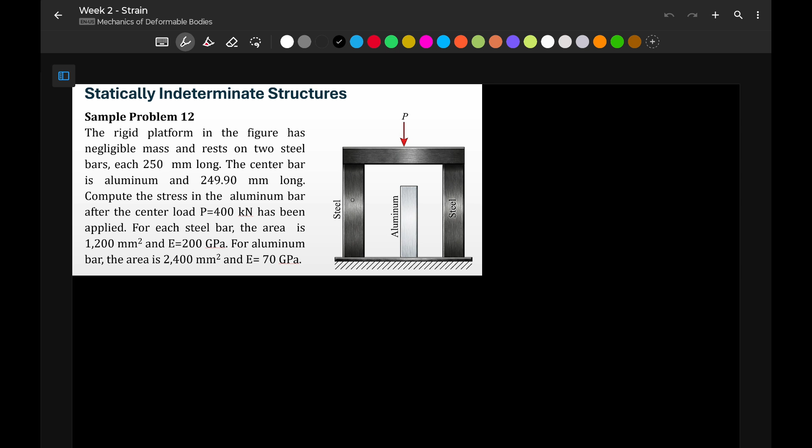Pagka yung load natin, na-compress na yung lahat ng material to this point. Imagine niyo na-compress na. Nandyan na yung ating bar. Ang mangyayari dito is dapat hindi doon. Yung steel bar natin, magde-deform on this length.

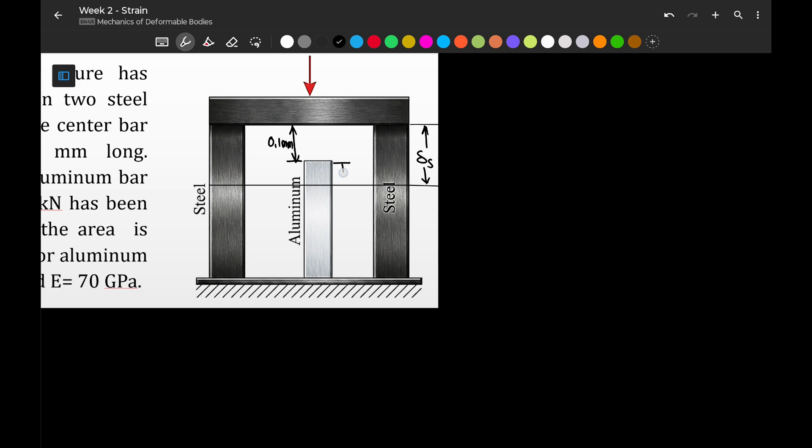Now, since shorter yung ating aluminum bar, so this is our 0.1 millimeter. Ang deformation lang niya ay itong maliit na to, deformation ng aluminum. So, from our compatibility equation, inuna ko lang yung compatibility equation for this one kasi obvious.

So, for compatibility equation, we can say that yung deformation ng ating steel, which is from this point to this point, is equivalent to deformation ng aluminum plus 0.1 mm. Kasi yun yung difference nila, 0.1 mm. So, this is our compatibility equation, and it will be the basis for our equation 1.

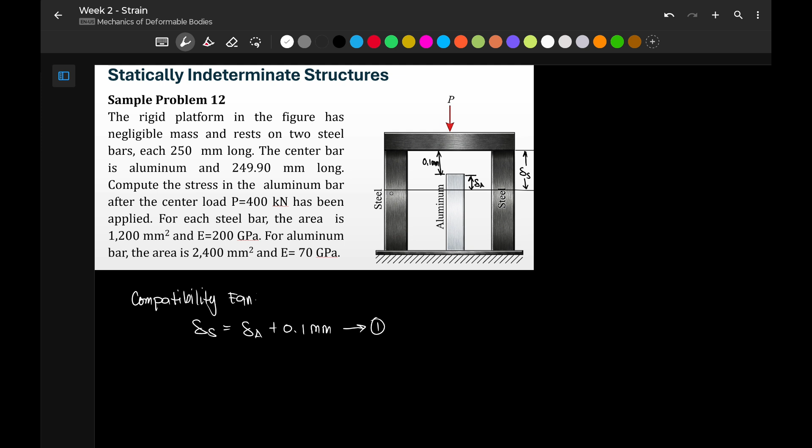Now, pag-usapan naman natin ngayon yung ating equilibrium equation. So, what will happen here is, yung P na to, i-resist yan ng tatlong material. Meron ka dito kay steel, at meron ka din dito kay aluminum, and then kay steel. So, yung ating equilibrium equation, we can say that our PA plus 2PS is equivalent sa value ng P, whereas P is 400 kilonewton. So, palitan na natin ito ng 400 kilonewton. So, we have now the basis for our equation number 2.

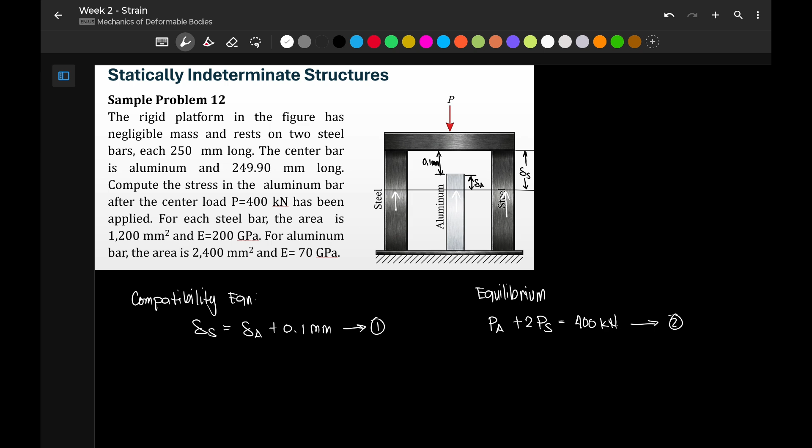So, we have two equations, we have two unknowns, we can solve for the missing forces. Okay, sige, let's expand this equation number 1.

So, the deformation ng steel, that is PL over AE ng steel, equivalent sa PL over AE ng aluminum plus 0.1 mm. Take note, may additional na 0.1 mm dito. Therefore, the unit of all of our length should be in millimeter. Kasi millimeter ito, dapat consistent tayo.

Alright, so what we have now here is PS multiplied by the length of steel. Ang length daw ng isang steel rod natin ay 250. The area ng steel ay 1,200 mm squared. So, consistent na lang tayo sa unit ha. And our E is 200 times 10 to the 3 Newton per millimeter squared, so that is gigapascal.

And for our aluminum, we have PA. The length here is 249.9 lang, over our area which is 2,400 square millimeter. And our E is 70 times 10 raised to 3 Newton per millimeter squared. So, consistent tayo sa unit na Newton at millimeter plus 0.1 millimeter.

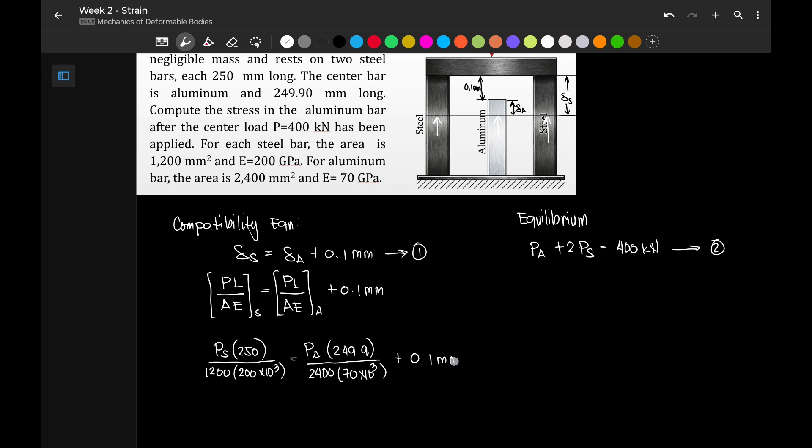So, we can say here that our PS, pwede nating i-transpose ito lahat dito sa kabilang side. Okay, so meron tayong PS equivalent to, we have here PA.

Kunin na natin yung value nitong 249.9 para maging coefficient na lang siya ni PA. So, we have 249.9 divided by 2,400 times 70 times 10 to the 3. We have 1.4875 times 10 raised to negative 6 PA plus 0.1 millimeter.

Take note, ang assumption natin, the unit of force here is Newton and the unit of length is millimeter. Okay, now ito naman, kunin na rin natin yung value. We have 250 over 1,200 times 200 times 10 to the 3. We have 1 over 960,000.

So, we have PS over 960,000. Pwede na nating iangat yung 960,000. So, we have here PS equivalent to 960,000 multiplied by 1.4875 times 10 raised to negative 6 PA plus 0.1. Again, take note of our unit, dapat consistent tayo na Newton at millimeter lang yung kinocompute natin. So, this is now our equation number 2.

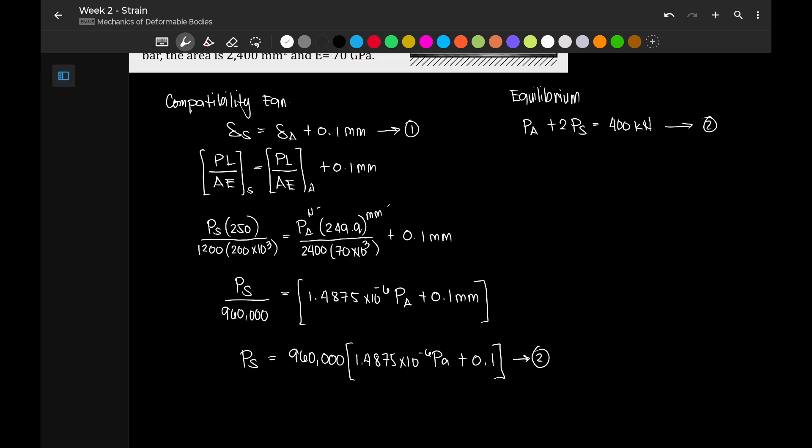So, dito pwede na natin siyang i-substitute. You can use either shift solve or manipulation. So, we have here PA plus meron tayong 2PS wherein our PS is 960,000 multiplied by...

1.4875 times 10 to negative 6 PA plus 0.1, equal to, take note, 400 kilonewton ito. Again, sabi natin, consistency of unit, gawin nating Newton. Here, we can solve for our PA, we can use shift solve na lang. So, we have here alpha x plus 2 times 960 times 10 to the 3 times 1.4875 times 10 raised to negative 6 alpha x.

Ang daming parenthesis. Plus 0.1. Take note of the parenthesis, kasi pag namali ka ng lagay ng parenthesis dito, GG tayo doon.

Okay, then shift solve. Let's solve for PA. We have PA equivalent to 53,941.9087 newtons.

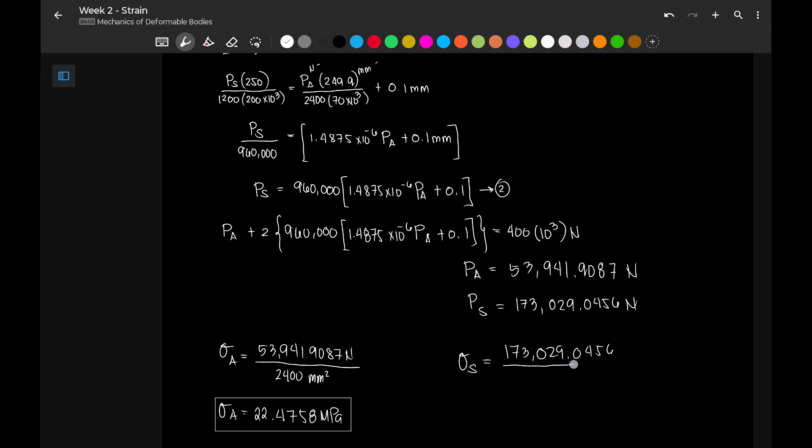Then for our answer number 2, we have 173,029.0456 divided by the area na 1,200 millimeter squared. So our sigma S is over 144.19087 megapascal. So sobra ako ng decimal.

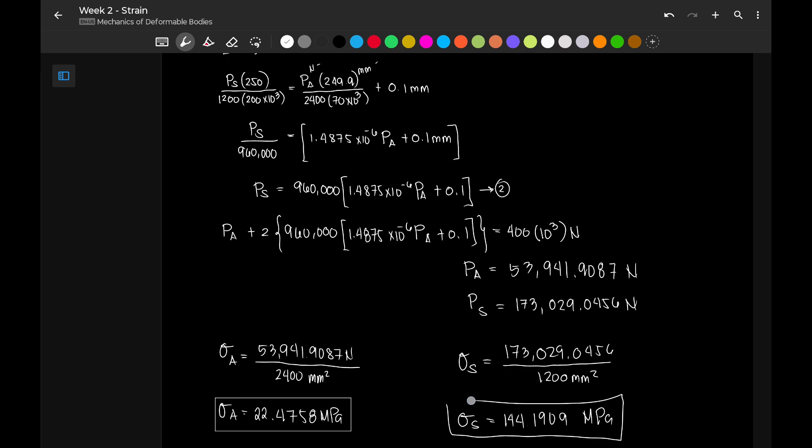So 3 or 4 yung gamit ko kadalasan, 144.1909 megapascal. So this is our answer for this problem.

So welcome back on our discussion on axial deformation. We are now on sample problem number 13. Sabi dito, a composite rod in the figure is stress-free before axial load P1 and P2 are applied. Assuming that the walls are rigid, calculate the stress in each material if P1 is 150 kilonewton and P2 is 90 kilo Newton.

Okay, so what will happen here is magkakaroon tayo ng reactions due to P1. Since P1 ay 150, si P2 ay 90, i-resist yan ng ating mga walls. So meron tayong reaction R1 dito at meron tayong reaction R2 dito. Similar with our previous problems, hindi natin alam kung ano si R1 and si R2.

Again, nakabase yan sa kung paano magre-resist ng load yung materials natin. Kasi kung ano lang yung nire-resist nila, yun yung tinatransfer nila sa support. Pero ang kaya natin gawin is to use method of sections to determine the internal forces inside each member. So unahin natin kay aluminum.

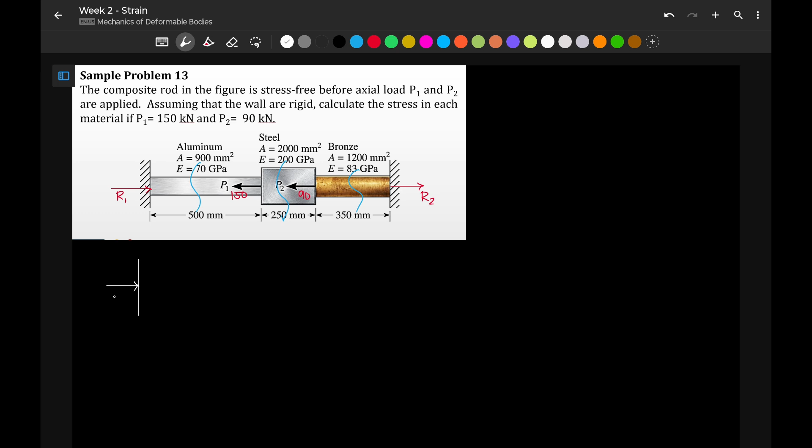For aluminum, meron tayong rigid wall. Okay, this is R1. And then magkakaroon tayo ng reaction dito. Let's call that PA.

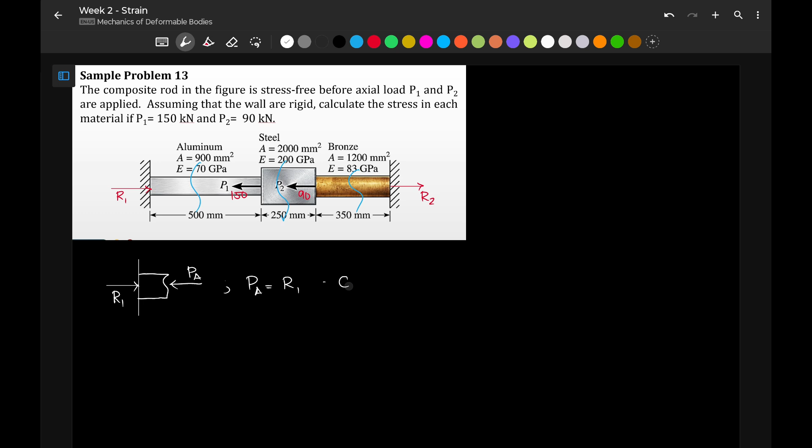Okay, that is compression by summation forces horizontal. We can say that PA is equivalent to R1 and that is compression. So nako-compress si R1 or si aluminum. Ibig sabihin, nagsho-shorten siya. Puntahan naman natin si steel.

Okay, then meron tayong steel dito. So nandito pa rin si R1. Then meron tayo ditong applied load P1 na sabi natin si P1 ay 150 kilonewton.

So pwede tayong mag-assume muna ng reaction. Again, assumption lang tayo dito, no? Hindi natin pwedeng sabihin kung ano muna yung actual value kasi unlike nung previous problem natin na dalawa lang yung material, we can easily distinguish na sila ay tension or compression.

Pagdating sa pangatlo, hindi natin alam if yung value ng R1 will be greater than 150. Kasi kapag mas mataas yung R1 sa 150 na to, ang mangyayari, assumption natin, compression. Kapag mas mababa naman si R1 kaysa kay 150, magiging tension, ano? So ang assumption muna natin dito ay tension.

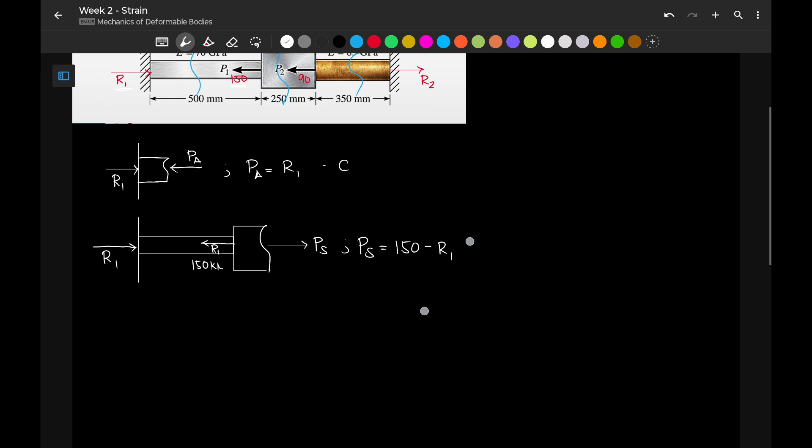Okay, next, finally, pagdating sa bronze, okay, ay ba't ba inano ko to? Section na pala to. Ay okay, meron tayong reaction R2 dito. Definitely, this is tension. Let's call this PB. By summation forces horizontal, PB is R2.

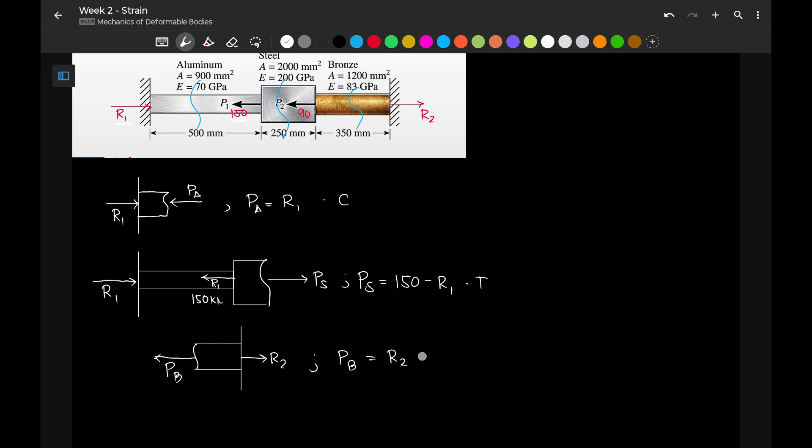Alright, so meron na tayo ngayong mga equations of equilibrium. Okay, that's one step. Step number 1, ano? But another thing is we can also say that R1 plus R2 is equivalent to what? 150 and 90. So that is equal sa 240 kilonewton. So we can say that R2 is 240 kilonewton minus R1.

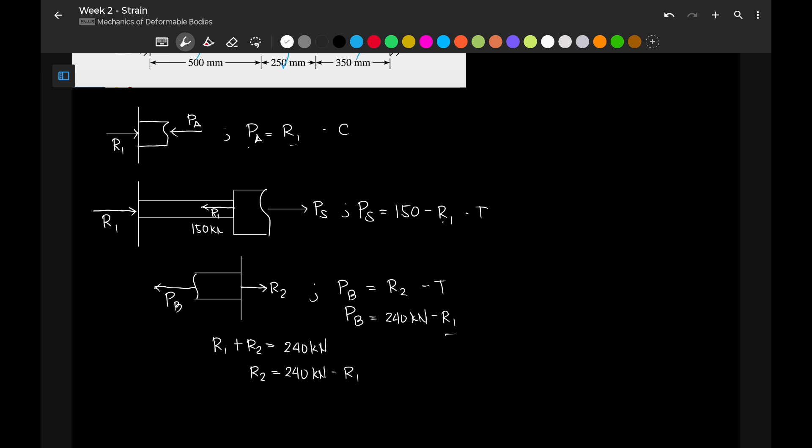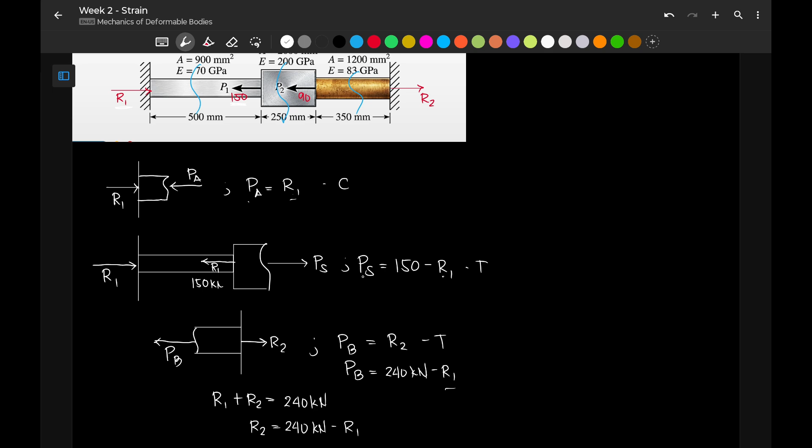Para nang sa ganon, si PB we can rewrite as 240 kilonewton minus R1. Lahat ngayon ng ating forces, internal reactions, ay in terms of R1. So consistent, mas madali yung pagsosolve natin. Ano, so again, kapag mga ganitong problem, gamitin nyo isang unknown variable lang. Isang variable lang yung nagde-describe ng ating mga internal forces. In this case, R1 yung ginamit ni Sir to describe the internal forces. PA is equivalent to R1, PS is 150 minus R1, PB is 240 minus R1.

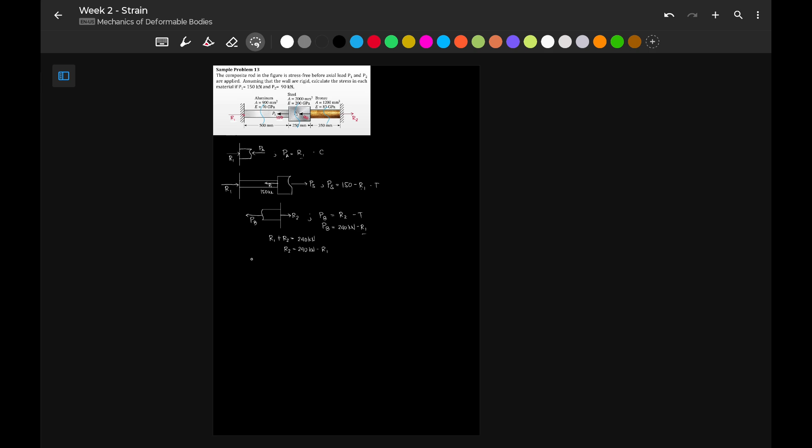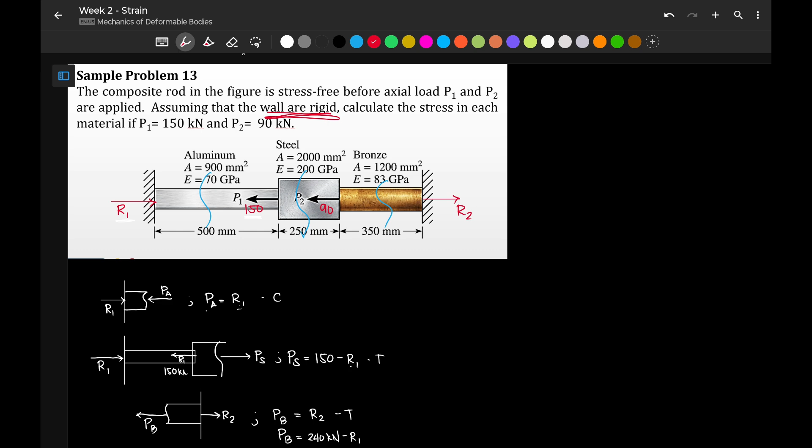Okay, next, tapos na tayo sa static equilibrium. Let me just resize this one kasi maubusan tayo ng space. Okay, puntahan naman natin yung geometry. Paano naman yung elastic deformation? Ang sabi ng problem, walls are rigid. Meron na naman siyang binanggit. Pag nakita nyo yung mga ganyang term, you assume that the total deformation is 0.

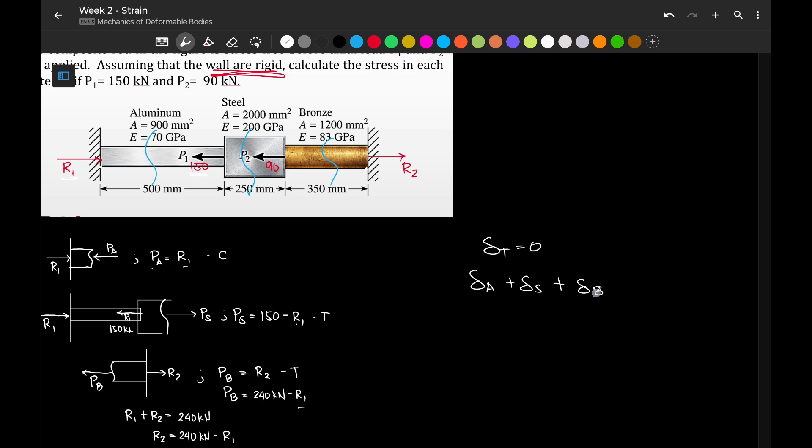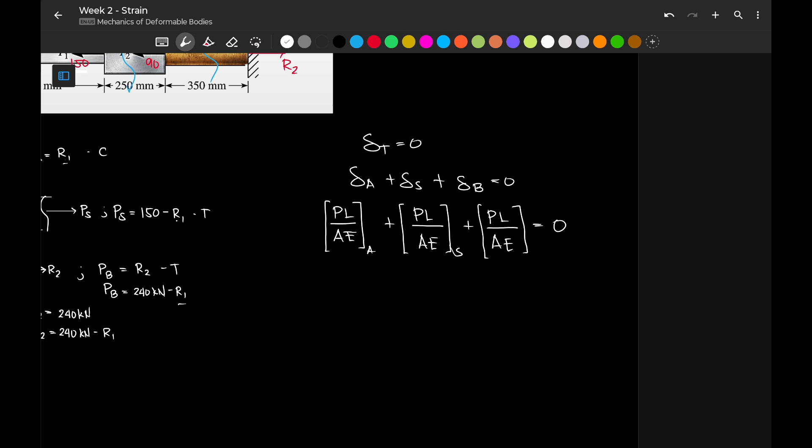Since it's rigid up to here, both ends are the same, there will be no deformation. So we can say the total deformation is 0. That is a compatibility equation wherein the deformation of aluminum plus the deformation of steel plus the deformation of bronze is equivalent to 0. Expanding this, PL over AE of aluminum plus PL over AE of steel, plus PL over AE of bronze equals 0. This is a long compatibility equation. This is our equation 2, and we have the values of P. Let's now build this equation, our deformation equation.

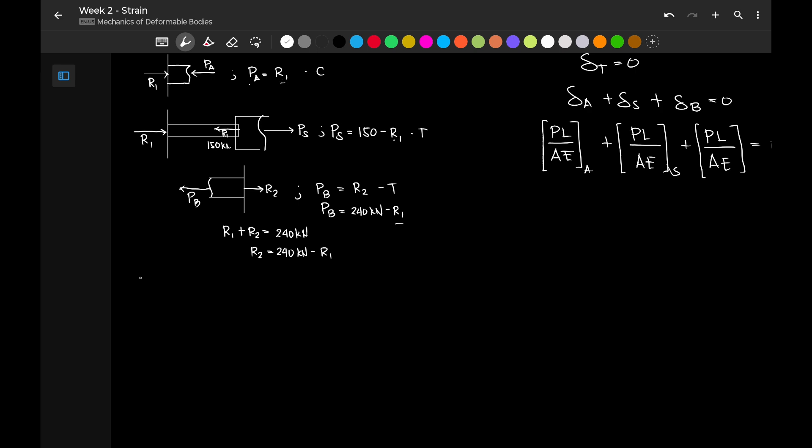For aluminum, that will be R1 multiplied by the length of our aluminum, 500 millimeters, divided by the area of our aluminum, 900 millimeters squared, and then our E is 70 gigapascal, which is 70 times 10 to the 3 Newton per millimeter squared. Then we add for steel.

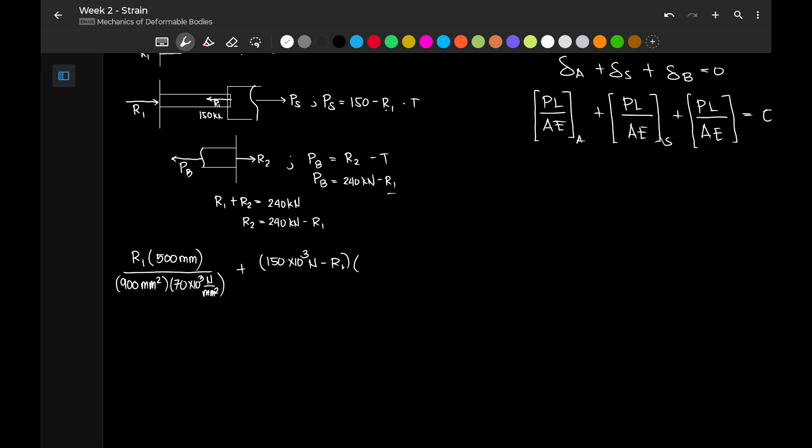For steel, our force is 150, but this 150 is in kilonewtons, so let's convert it to Newton, R1, to be consistent in units. The length is 250 millimeters over the area, which is now 2,000 square millimeters, and our E is 200 times 10 to the 3 Newton per millimeter squared.

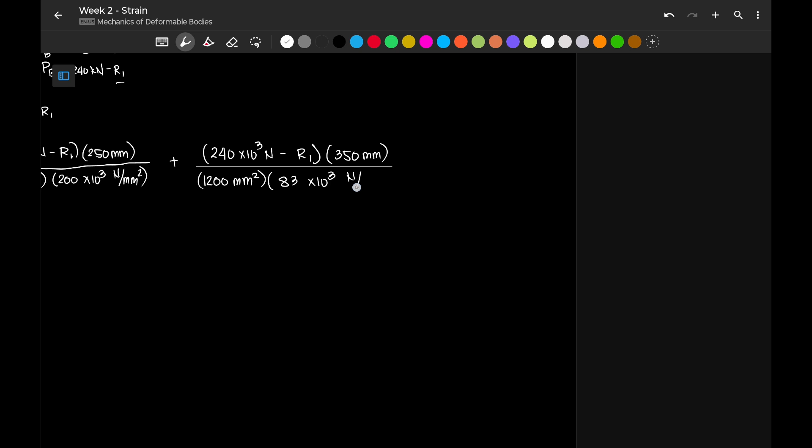Lastly, we have the bronze. Our P for bronze is 240 times 10 raised to 3 Newton minus R1. Then our length is 350 millimeters, divided by our area, 1,200 square millimeters, times our E, 83 times 10 raised to 3 Newton per millimeter squared, and that should equal 0.

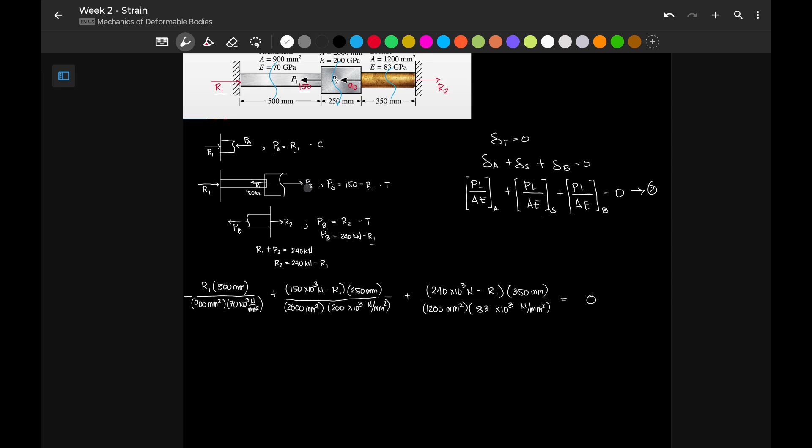Now let's go to the sign convention. Take note that our aluminum is in compression, so this should be minus. Whereas our assumption is that steel is in tension, and bronze is also in tension, so only this one is minus. So we can now solve for R1 using this equation.

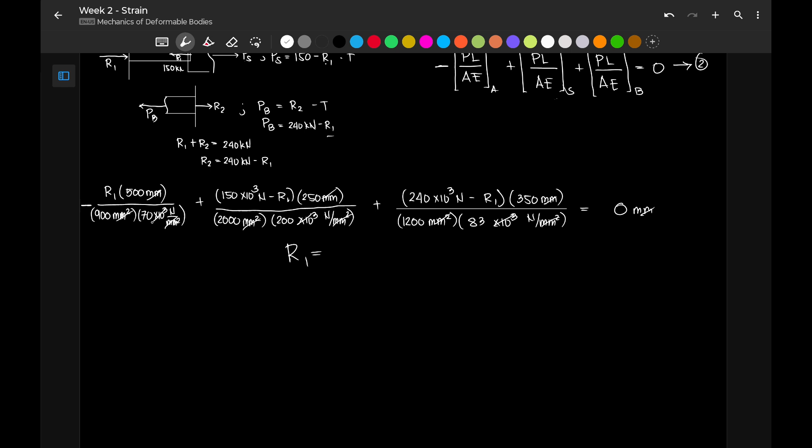Times 70, plus we have here 150, the times 10 raised to 3 in Newtons is still there, it doesn't go away, minus R1 times 250 divided by 2,000 times 200, plus, lastly, we have 240 times 10 raised to 3 minus R1 times 350 over 1,200 times 83, and my space is running out, equals 0.

Let's shift-solve for R1. Since this is in Newtons, let's assume a high value, around 100,000. So our answer is R1 equals 77,604.945 Newton. And our R2 will be 240 times 10 raised to 3 minus our R1, giving us R2 equals 162,395.055 Newton.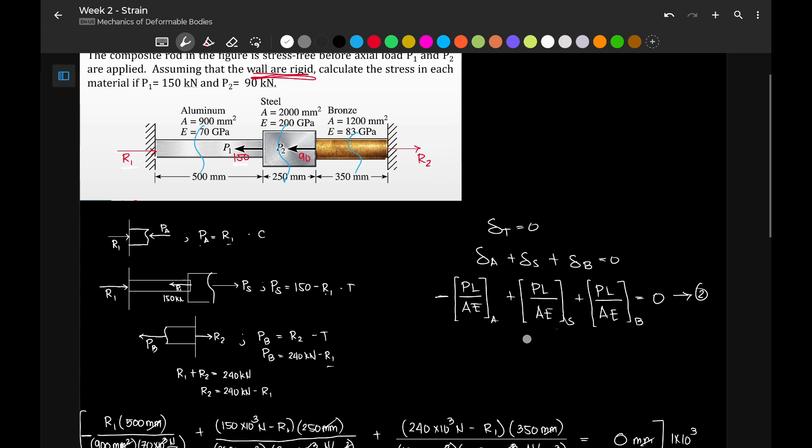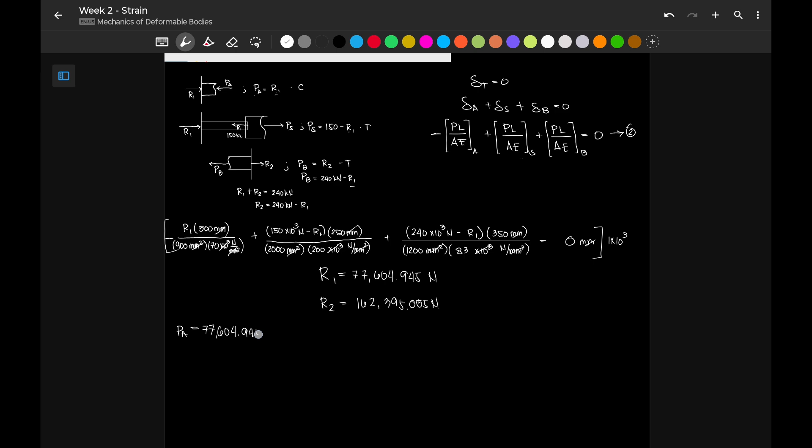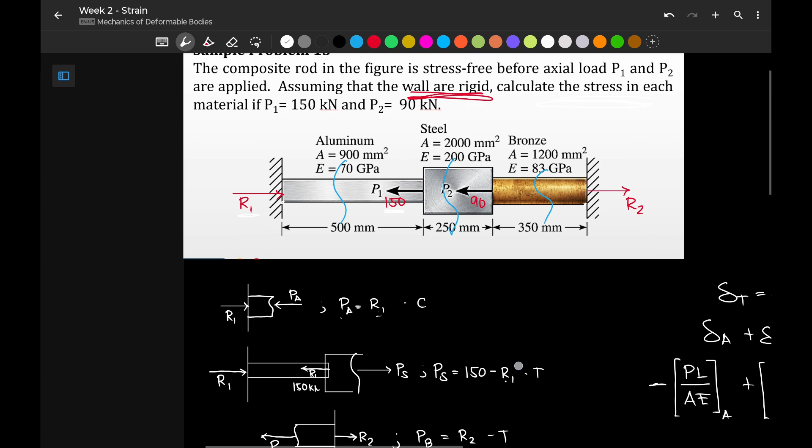Next, since the question is really asking for the stress in each member, let's first find the forces. Our PA, since that is equal to R1, is 77,604.945 Newton. So our stress on aluminum is 77,604.945 Newton divided by our area for aluminum, 900 millimeters squared, giving us 86.2277 megapascal.

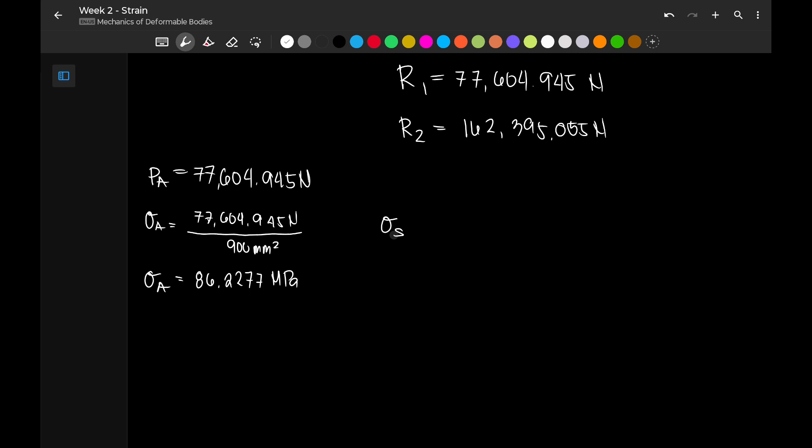Okay, let's go to steel. Our formula for steel, the internal reaction of steel, is 150 minus R1. So that is 150,000 minus our R1, 77,604.945 Newtons. Our area for steel is 2,000, so our stress on steel is 150 times 10 raised to 3 minus R1, over 2,000.

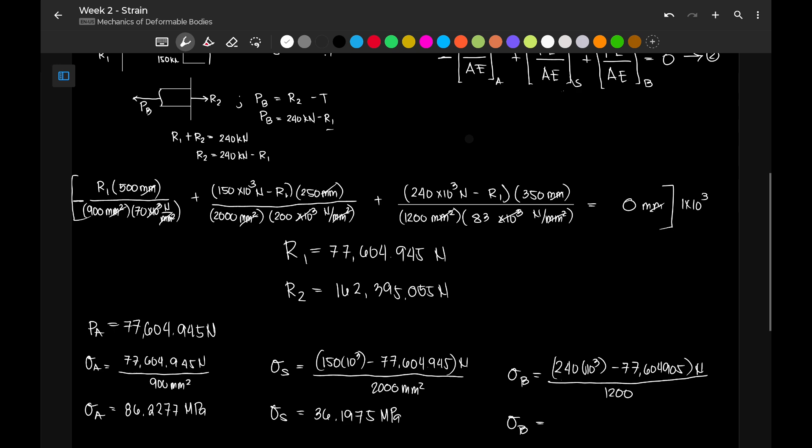We get 36.1975 megapascal. And lastly, for bronze, that is 240 times 10 raised to 3 minus 77,604.905 Newtons, all over our area, 1,200... I made a mistake, let me redo: 240 minus R1, that's right, divided by 1,200. We get 135.329 megapascal, and that is our answer to this problem.

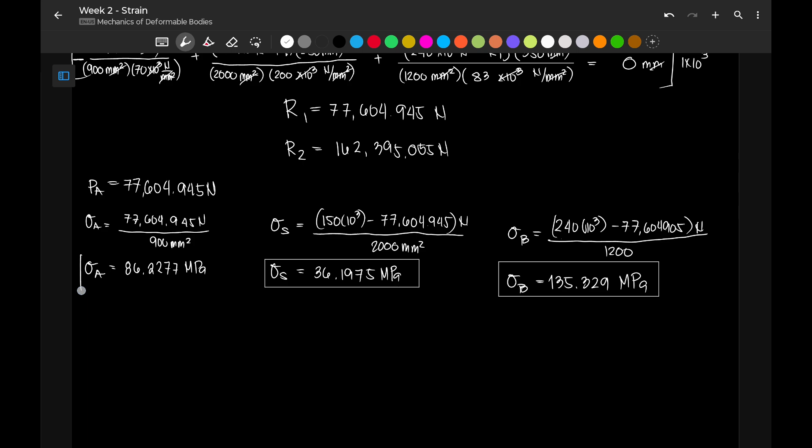And that's it for our sample problem number 13. Let's see each other on our next sample problem.